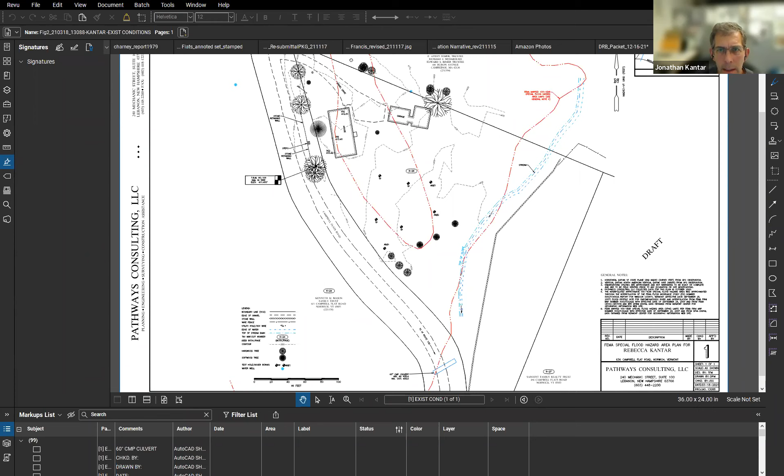So now I'm going to bring up a slide that is not exactly in your photo, it's in Keith Moskow's drawing, but I wanted you to see that Jeff Goodrich and Pathways Consulting did do the site plan, here's their letterhead. You have this on file as part of our previous hearing. I apologize, I didn't include it in the packet, but it's represented in Moskow Architects drawings as well.

So here's the DRB packet. One of the things this board had asked for after our previous hearing was to show the relationship of what we are proposing to what's existing. We'll come back to this in a minute. I'm going to let Jeff describe that in more detail.

This is what we're proposing. This amoeba shape here is like an island, which is outside the jurisdictional area, the FEMA jurisdictional area.

So we're not really concerned with the type of construction here, though of course we're going to be smart about it, and make sure it's quite resilient. But you can see the barn is within that border. The patio and decking, most of the decking is in this area. The pool is in this area, and most of the leaching field, this is a proper engineered leaching field, was outside the FEMA boundary.

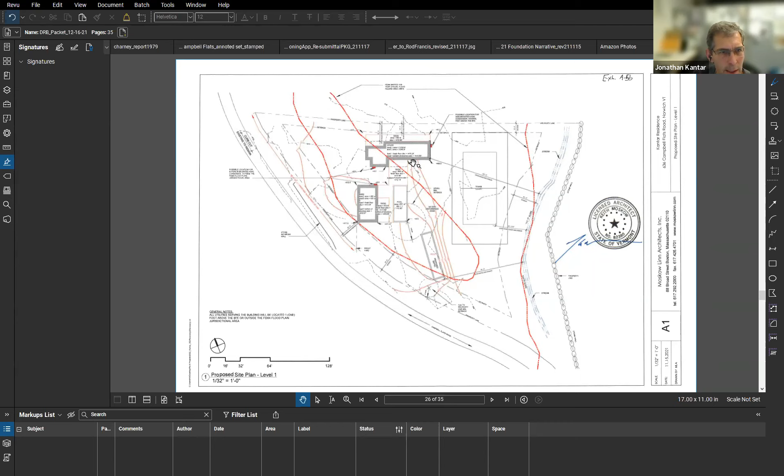We've heavily notated these drawings. For example, we've noted where we might put HVAC equipment, again outside of the floodplain area, so that there's no harm coming to them. Additionally, we'll be smart about it. These will be super efficient buildings, so they'll only need small heat pumps to operate. Those heat pumps will be probably about 4 feet off the ground on the exterior, so that they don't get covered with snow. They may even have a little roof over them to protect them.

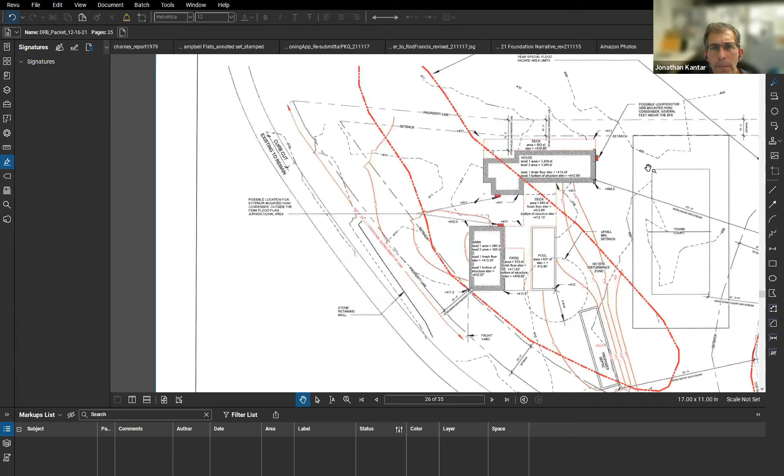I think that's all I'll mention about this drawing, but that gives you a flavor for what we're doing. There's an intermittent stream back here, as I mentioned in the photos. We are planning to put a tennis court in. That will be at grade, so it's in the floodway, but it's not impairing the floodway. We will also make that out of materials that won't get destroyed by floods, because we know it's going to flood. So we don't want to do things twice here.

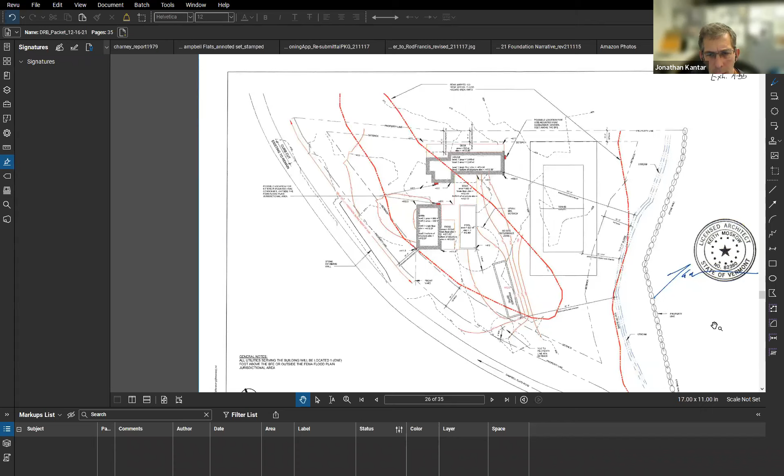Let me go on to the next. This was just the site plan without all the contours and stuff.

So here's what the house sort of looks like. This is looking at it from the north, windows facing out to the field. It's basically a 1.5 story house, slightly smaller than what's there presently. It has none of the impact on the floodway that the old house has. And of course, we're trying to make this net zero, so it will have no environmental impact other than building it. We are conscious that there's embodied carbon involved, and we will select our materials wisely to minimize that impact.

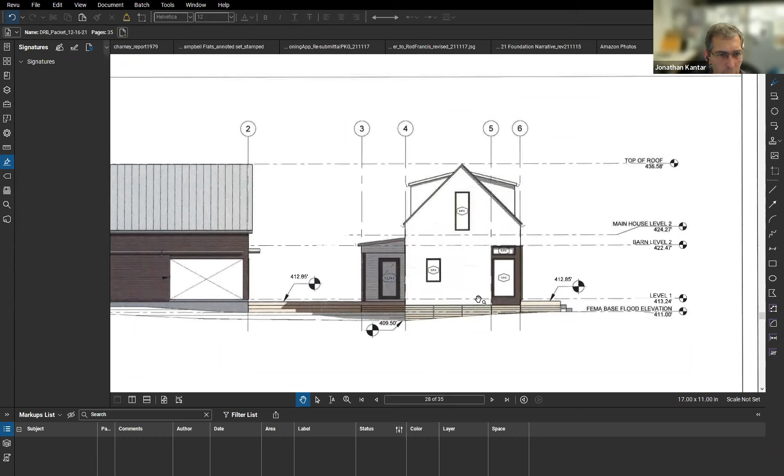On these plans, you can see we've identified the FEMA base elevation, and we've got the first floor, the underside of it, 1 foot above it. So the actual floor itself is probably a little over 2 feet above the base flood elevation. Let me go to the next plan.

We included some additional comments on this plan. For example, we've made sure to identify that all these panels hiding the support system and structural system of this house, which are piers, are meant to blow off or break away in the event of a flood. So they're not permanent structures.

They're designed to break off if need be, and they'd also be lattice where water could go through them, so that hopefully they won't even break off.

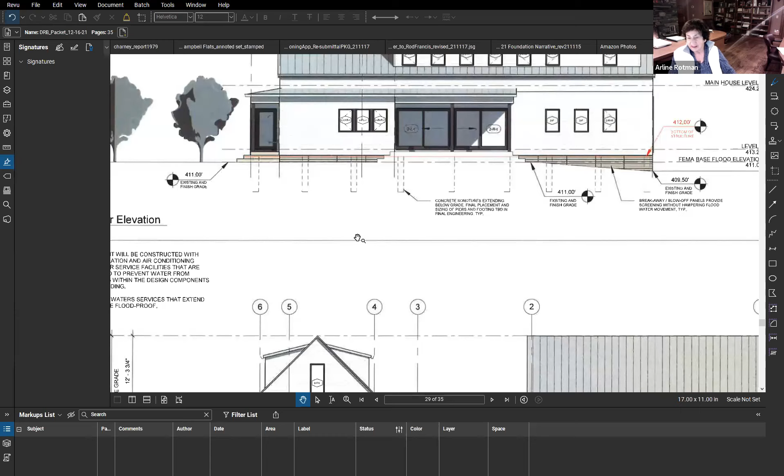Sorry, can I just ask a question? Are these relevant to criteria we need to opine about, Rod or Arline? I'm not taking notes, this is a lot of detail. So we have those exhibits in? Yeah, I think we can. I was going to let him finish and then remind everybody that all of the documentation is in evidence already.

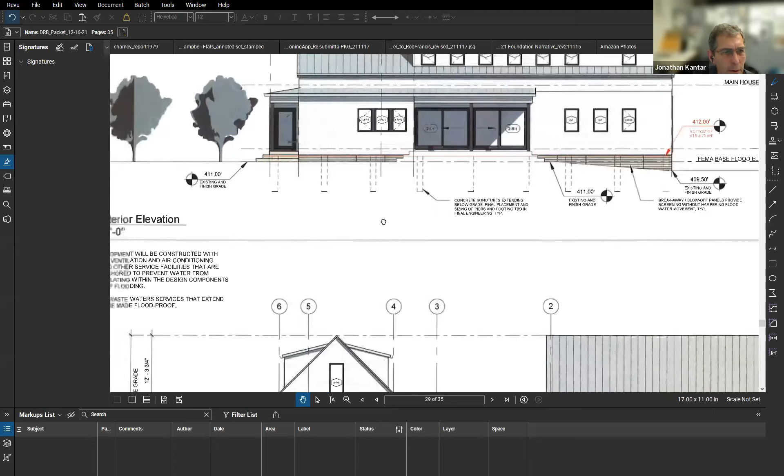I'm just pointing these out because these were specific comments that arose in the prior hearing. While I trust every member of the board to read all the documents thoroughly, sometimes having someone underline them is helpful when it comes time to review. I don't mean any disrespect, I was curious if this was the level of granularity you received feedback on. The reason these comments are in here is in direct response to issues that arose prior.

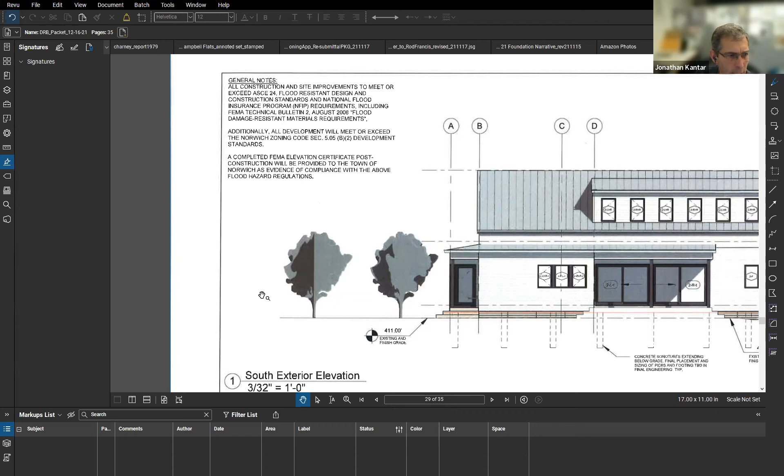We've got in our notes here that we intend to meet all of the various requirements. I won't go into detail, but we're trying to address all the requirements of that particular section of the floodplain regulations.

I'm going to interrupt you now to say, if you could move a little faster, I find this very helpful, but it's a lot to absorb. All the other documents, if I remember correctly, speak directly to the questions that had to be answered from our denial the first time round. Okay, so you could finish up.

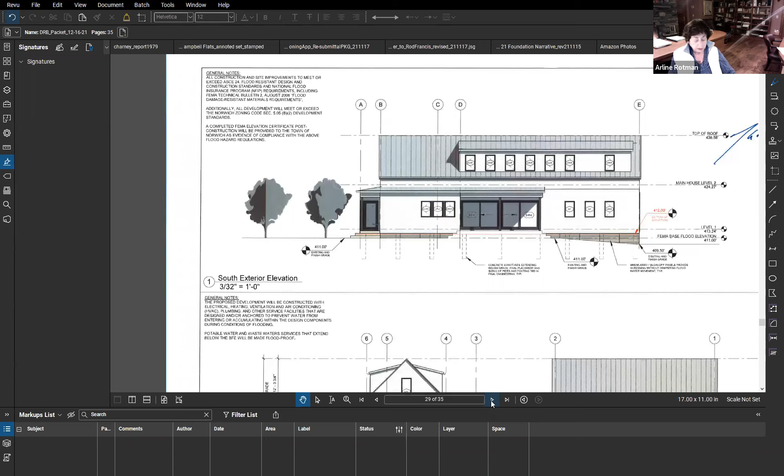That's really all there is in terms of what I want to show you. I'm happy to go through the previous concerns point by point, I've submitted those in writing. I'm happy not to if people feel that way, but I wanted to make sure this is the opportunity to answer everything, so I don't get a surprise in the mail saying you've been denied and I haven't had a chance to respond.

Jonathan, or if you feel something is missing, after the presentation people will have an opportunity if they need to answer questions. So all of these documents are in evidence, and they are in direct response to the letter sent to you telling you all the things we needed to have done for us to consider your application complete. So I think we could move on.

Why don't I turn over our presentation briefly to Jeff and let him chime in on anything he thinks I may have missed or would be helpful for you guys to know. He's the fellow that had the most direct communications with John Campbell.